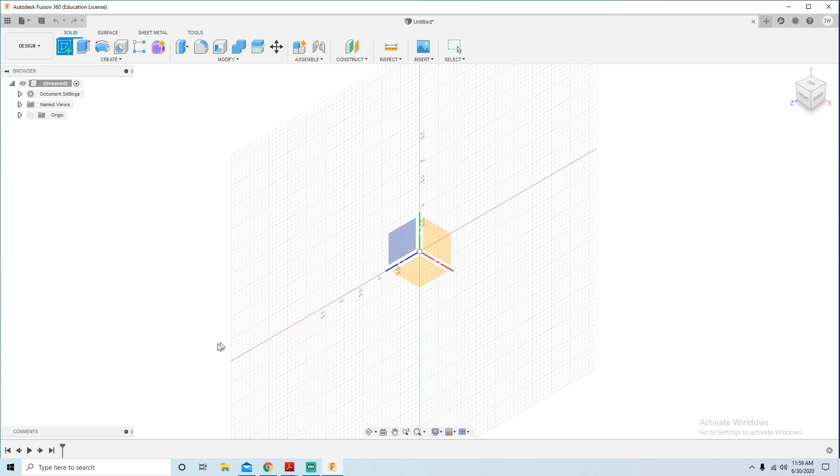The way I have mine set up is traditional SolidWorks, where my Z-axis runs along this plane, this is my Y-axis, and red is your X-axis. So I'm going to draw on my Z-plane, twist everything around to me, and then the first sketch I'm going to create on the Titan 4M, if you're looking at the print, is the base triangle.

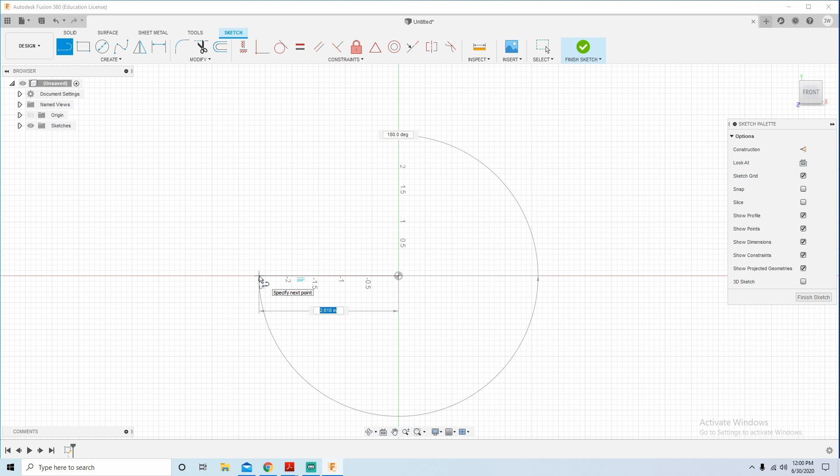I'll start by creating a line. On the print it starts off from center and drags out to 1.155. There's our first line, and then it tells me to go up to 2 inches on center. So here's our first leg.

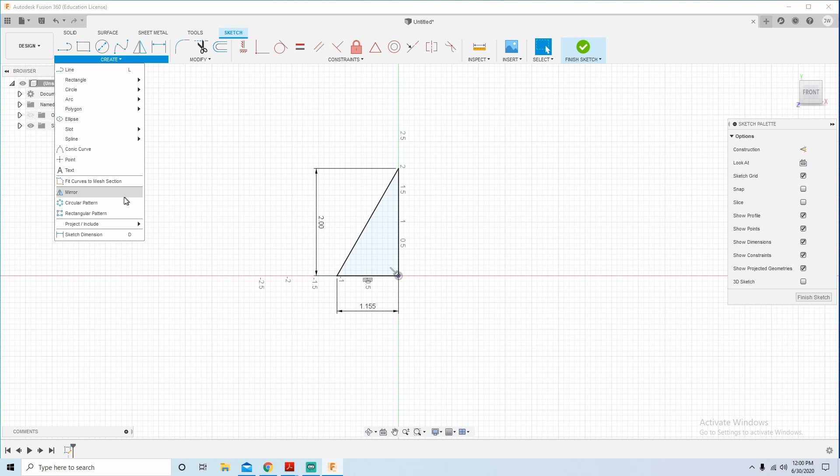Our second leg is made up of the exact same thing. If you want to mirror something, and this is a perfect example with this center line, you're going to do create and mirror. The objects you want to mirror are the actual lines, and the mirror line is the line you want to mirror across. Once you click on that axis, you'll see a phantom line of what's going to take shape. Just click OK. At this point we have our triangle drawn.

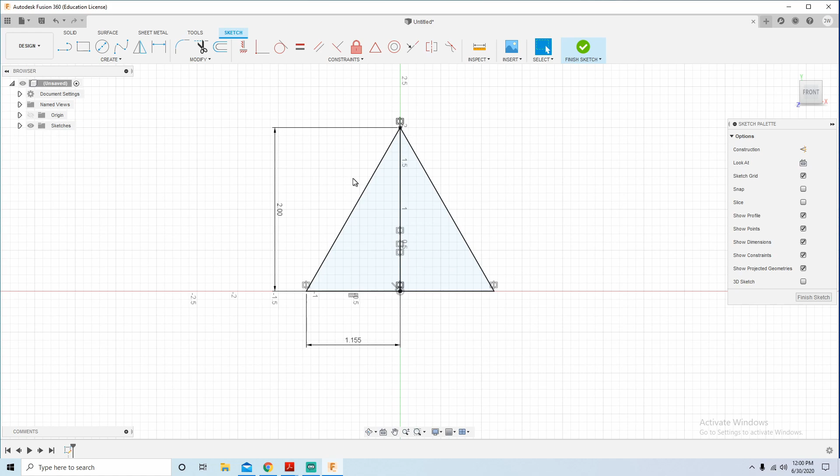The only thing left to do is the 50 thousandths radius on the very tips. I can do that by going to fillet, selecting the two sides I want, and changing that to 0.05. There's the first one, second one, and third one. Once that's done, we're going to click finish sketch. And there is our triangle.

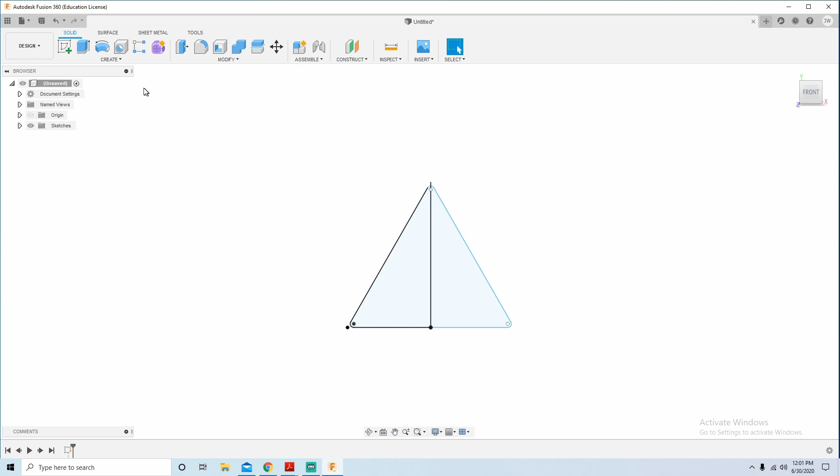At this point, we want to turn this sketch into a model. So we're going to go to extrude. The profile is what you actually want to extrude. I'm going to click both sides of that triangle.

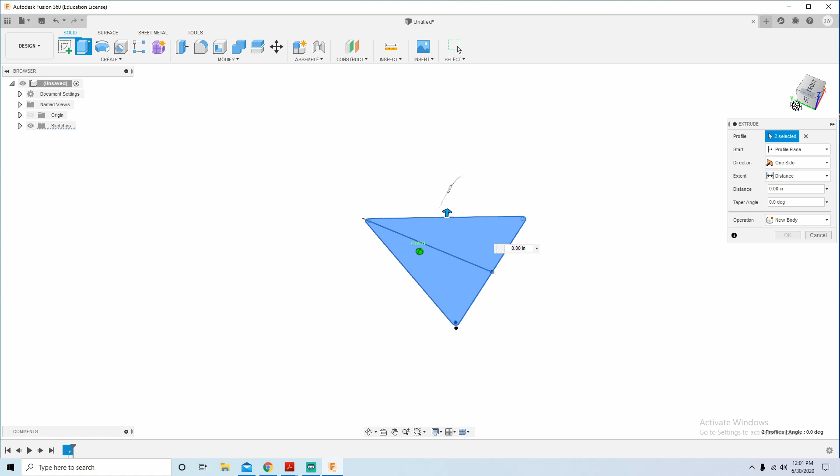If you hold the scroll wheel down on your mouse, it allows you to orbit everything around, or you can grab up here and move it around, to throw the axis off so you can look at an object in any shape, way, or view. You'll notice that upper right hand corner, the square is actually pivoting with me.

So if you want to take a second and set your preferences up like mine, you go in where your name is at, hit preferences. Once you're done, click apply and OK.

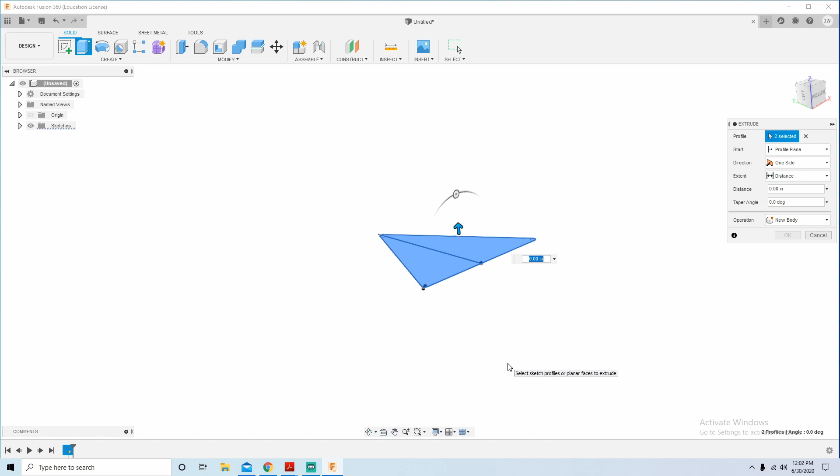Back to the solid creation. We've selected our profile - I'll do that again, we're going to select that first half and that second half. Then we're going to extrude this up 750 thousandths. Once we're done, we're going to click enter. And there is our triangle.

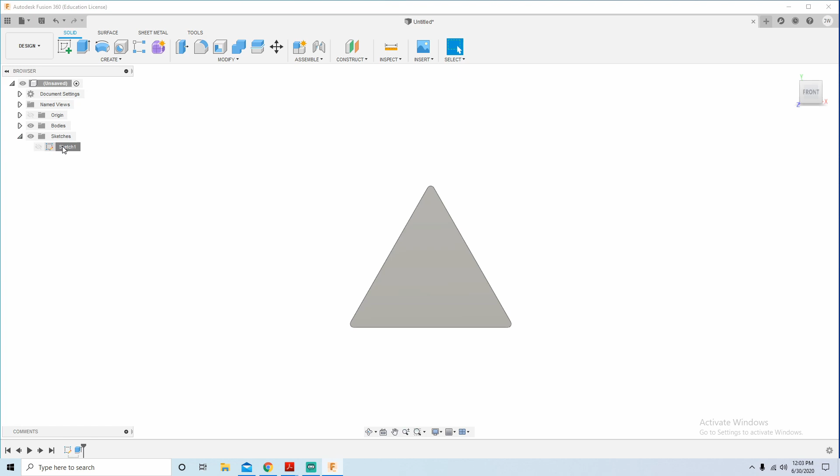To refocus, we're just going to go back to our front view and scroll that around. Now, at this point, the only thing left to do is the 3 holes, the inner pocket, and also the 3 side cuts. So now we're going to open that sketch where we can see it, because it comes off of this point up here for the first hole reference, the point out here for this reference, and then we'll mirror across.

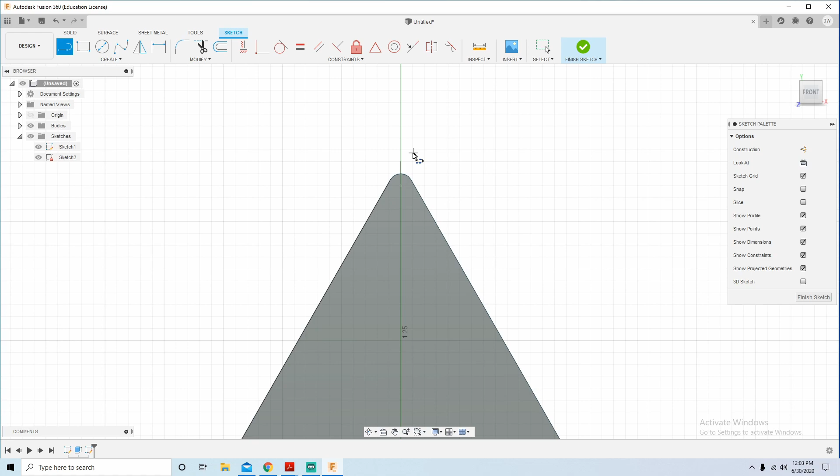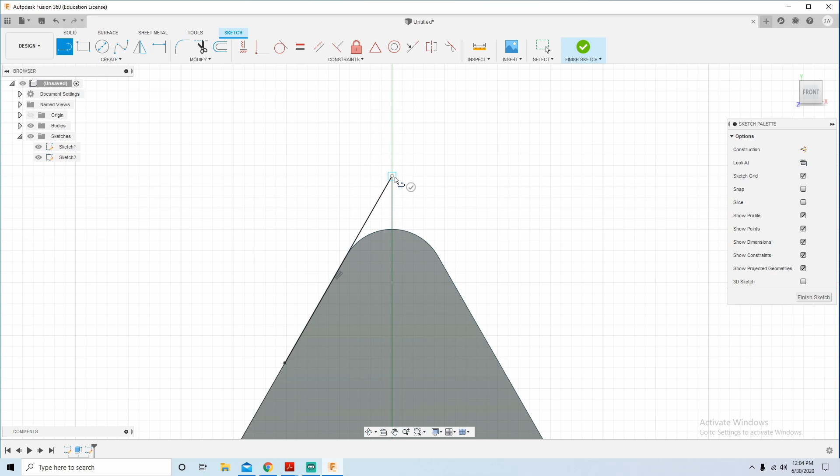So I'm going to zoom in and create our first line, sketching on top of the part profile itself, and my first point is going to be the end right there. Now if you're having a problem getting it to snap, don't worry, it happens. To get that geometry back, I'm just going to hover, click anywhere on either one of these lines, hover over the line for a second, you'll see that crosshatch, that X, and you drag that straight up, it'll snap right there. Then I do the same thing over here.

This is just putting the geometry back in its place and having the old geometry as a reference point. So now what we're going to do is create a line from here up to 1.637.

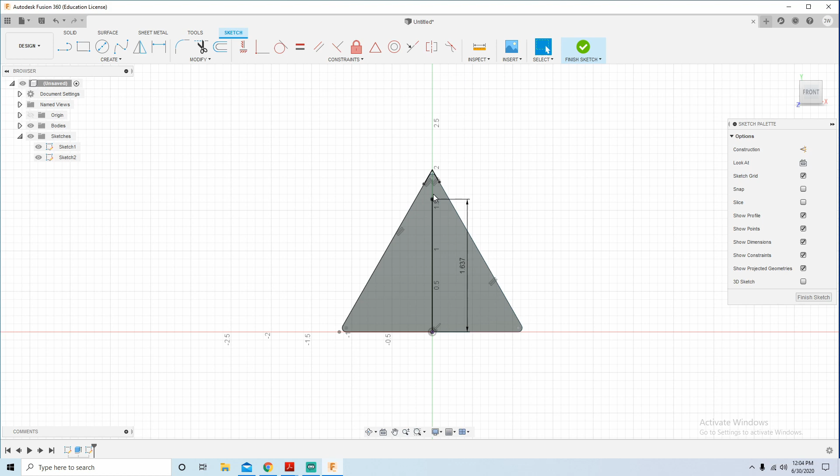There's the center of that circle, and again this is only for reference from me. If you don't want to do this, it's not required. The second hole position is actually this location right here.

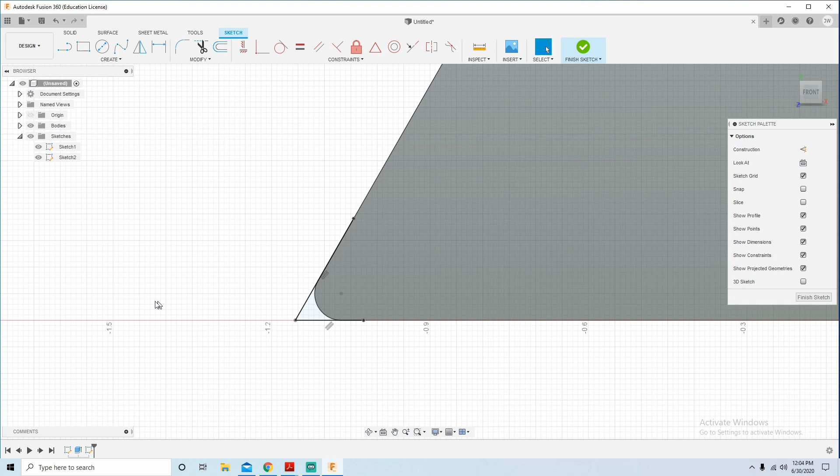So we're going to click line, or L. Now you'll notice I can't actually hover on that line, so you'll have to do what I did earlier. Hover over till you see that crosshatch, drag down, and it will snap. You can hit T for trim and cut that line off if it bothers you. It doesn't bother me, so I normally just leave it.

So now at this point, I need to create a line from the center out to 0.828. Now I'll need to create a line from here up to 0.189. Oops, sorry, fat fingered out and looked at it wrong.

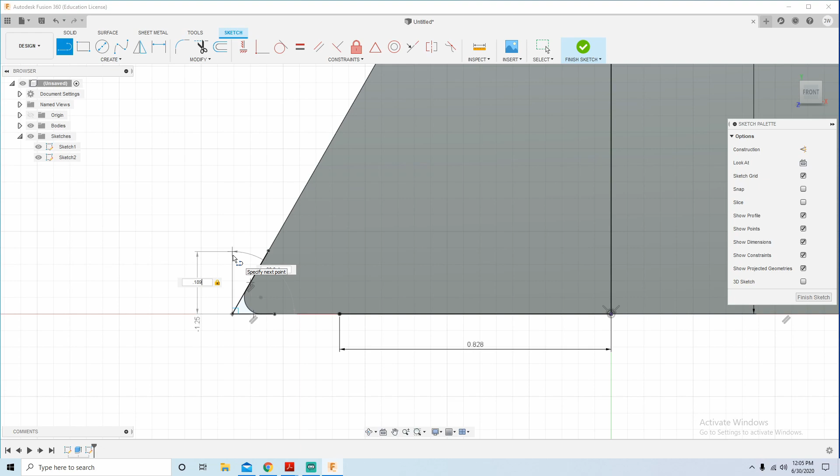Once I've got that created, I can go to my circle function and hover over this dot and drag up, and you'll notice I'll get 2 blue dotted lines right here indicating my intersection point where that circle is at. Then I'll click and drag out. That circle is a 10-32.

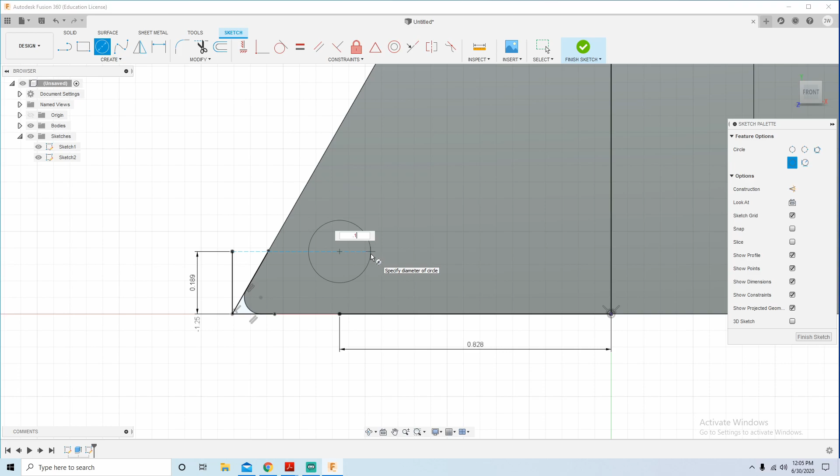So if you don't know what size to make it, you can make it any size. I'm going to make it 170, which is close to 10-32. Then my second point is up here. Drag that out, 0.170. And then I'm going to do the same mirror function.

So create mirror, select my object, select my mirror line. Oops. Select my object, and then select mirror line, and then select your line. There's our hole. We'll click OK.

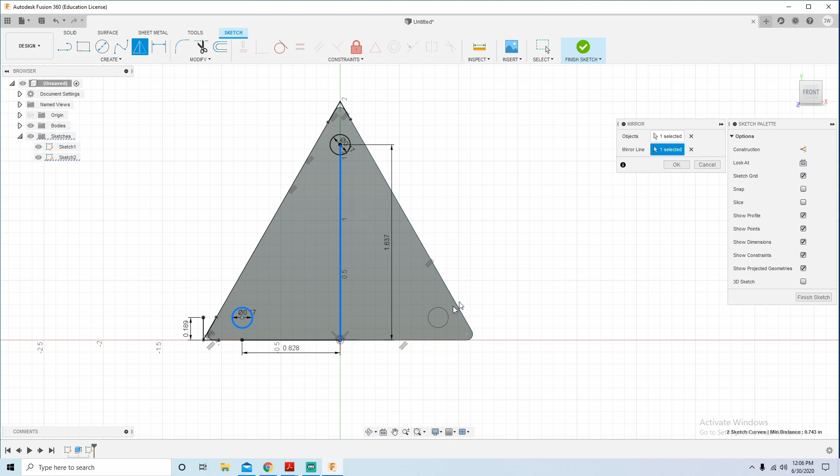Alright, so at this point, the only thing left to do is put the holes in. So we're going to start by selecting hole. We're going to select multiple holes. We need to call our sketch back up. It went away. And then we have to define what kind of hole it is.

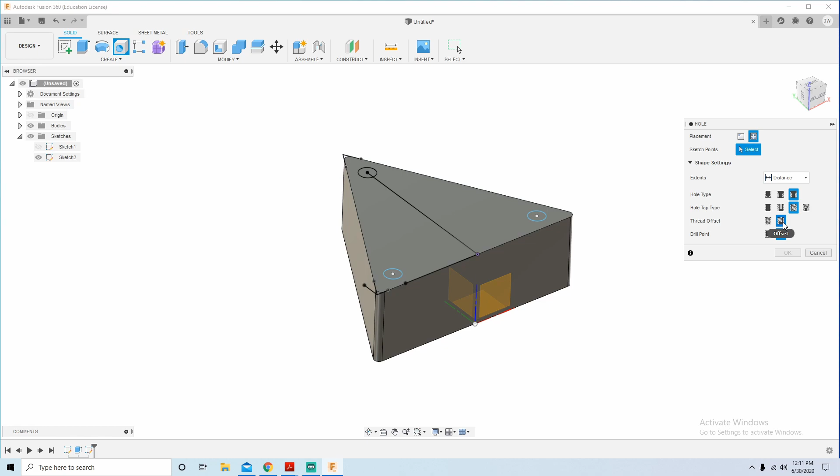So it's a countersink, threaded, offset, and we're not going to do offset because it's saying full. Actually, if you look at the print, that thread is going all the way to the bottom, and it's not flat, it is angled. So we're going to start by selecting our holes.

So at this point, we have all of our data in. And this number's a little bit wrong right here. Let's change that to 0.375 because this is showing it going all the way to the bottom. Make sure that you have all these in, so it'll be 375 thousandths deep, 205 thousandths chamfer.

I am using 90 degrees because I'm actually going to use a 90-degree drill mill from HTC. 118 degree drill point. Our thread size is a 190. It's a 1032 2B class fit, right-handed, and I'm going to click model, so it models the thread instead of leaving just a picture inside of a hole.

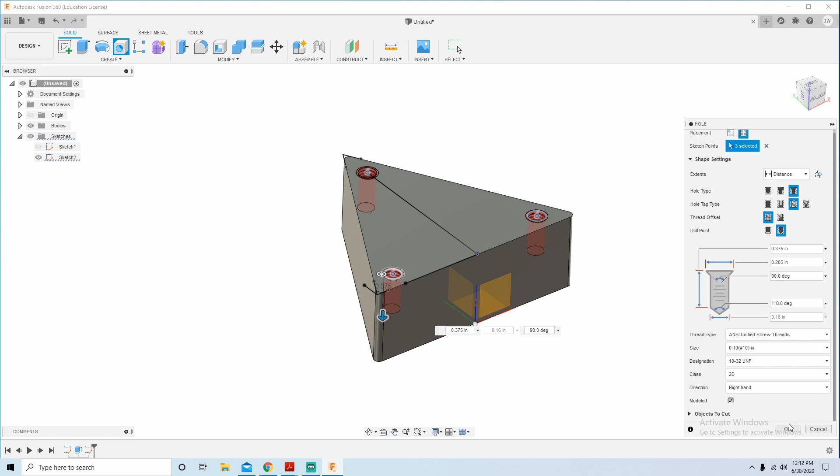And then at this point, the only thing we got to do is hit OK. Now you'll see the chamfer and the thread, and if I get this angled right, you'll see the point in the bottom of the hole. So them 3 holes are done.

Now what we're going to do is we're going to turn that sketch off, and then we're going to work on the pocket. So at this point, that pocket is really simple to do, and I'm actually going to go create another sketch for this, even though you don't have to. You could work off the first sketch, but I'm going to work off of a new sketch.

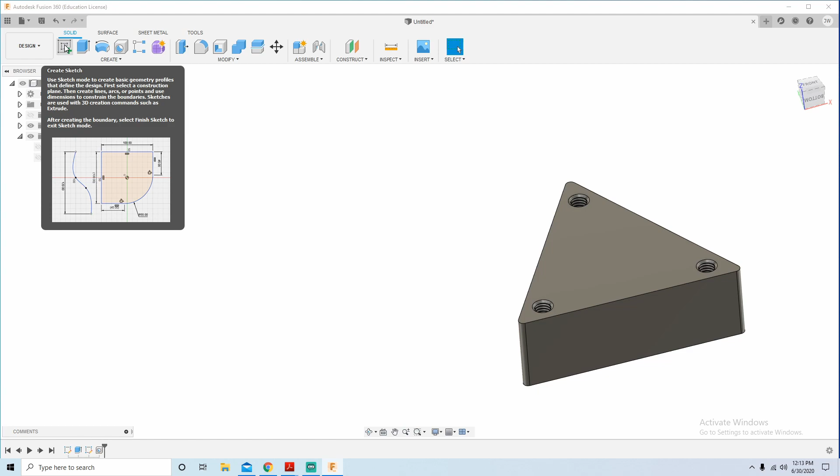So I'm going to do sketch, top of my part. It will automatically go to the face of it. And then we are going to draw literally another triangle stacked on top of this one. So at this point, only thing we got to do is click line, drag that up 2 inches, right?

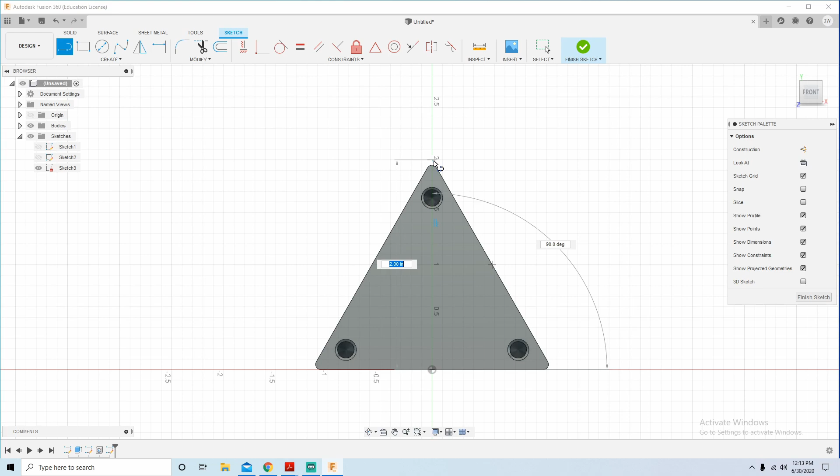I don't know if it'll automatically pick up. It won't. So 2 inches. Drag this over and out, that 1.155. And then here we go again.

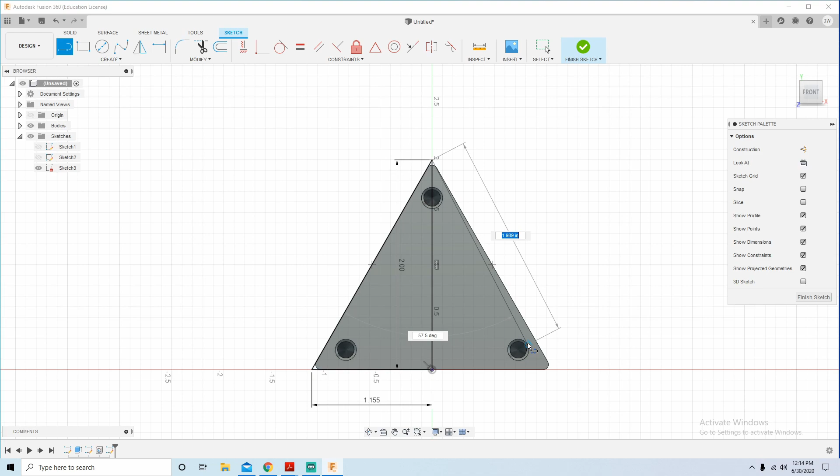So pretty easy to do, not very difficult. I am going to use a technique here where you're running parallel with it, and I'm going to just stack it on top, missed a line there. That way I don't have to worry about it, and then I'll trim it away later.

So at this point, there's my triangle that now exists. And then that inner pocket is actually an offset of 174.

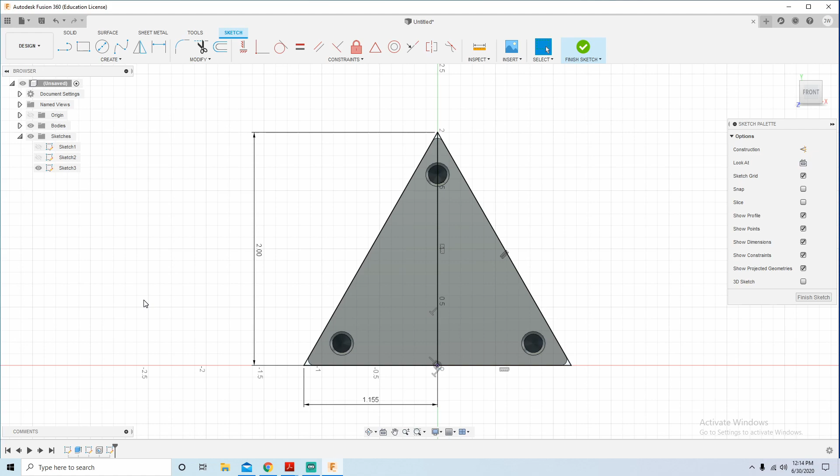So now the only thing I have to do is go to my offset tab, double click there, and type in 0.174. There is my offset amount. I'm going to click OK.

And then now all that I got left to do is put chamfers in. So now, pretty straightforward and pretty easy. So I'm going to come in here and click fillet.

Here and here, that chamfer, well not chamfer, that radius is 0.189. And I've got the same thing here and here and here and here. So that's done. Just click enter. That will go away. And then I have the outside radii.

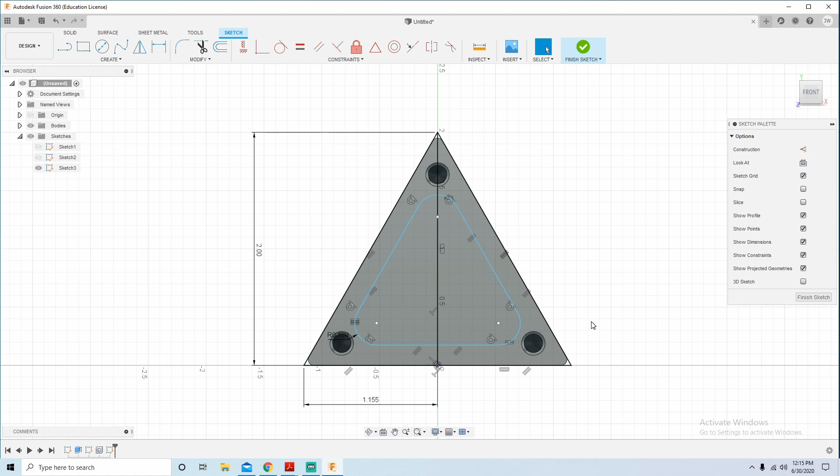Now it is actually saying the outside radiuses are also .189.

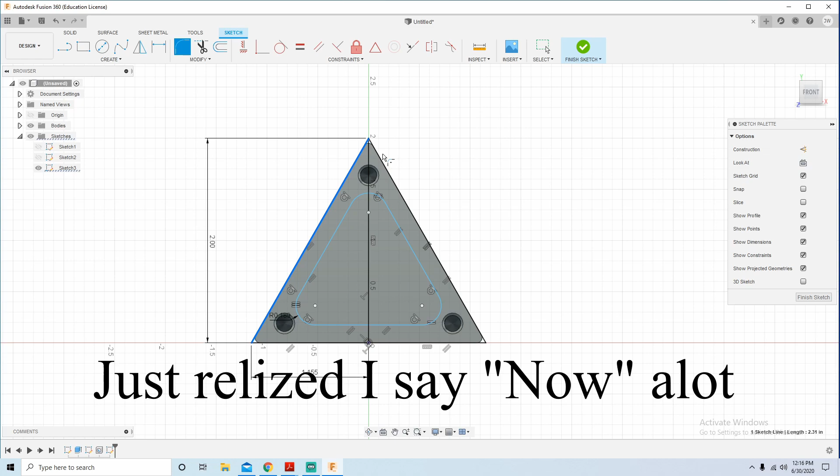So let's do that. Let's do the outside radius of .189. Fillet, there and there. I know this looks a little funny, but there we go. So there is all of our radiuses in.

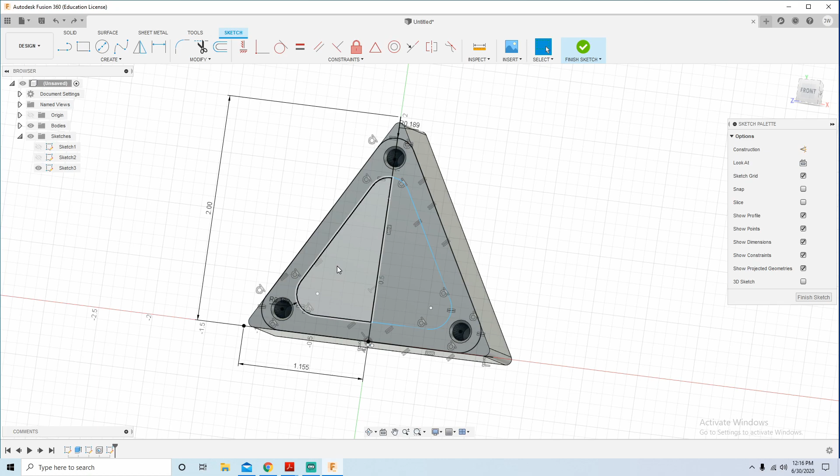So now at this point, only thing we've got left to do is extrude these little end pieces down on the ends, and also the pocket. Now they are two different extrusions, which is simple to do.

You're going to do extrude. I'm going to do the pocket first, and that I believe is a 1/2 inch. Nope, 650 thousandths deep. So minus 0.650.

Then I'm going to turn this sketch back on and do extrude again. And then I'm going to go around and select all these little pieces and do minus point.

What's the depth on those? I'll find it here in a minute. 375 thousandths. So it's in a little note at the top of the triangle. So there's the end pieces.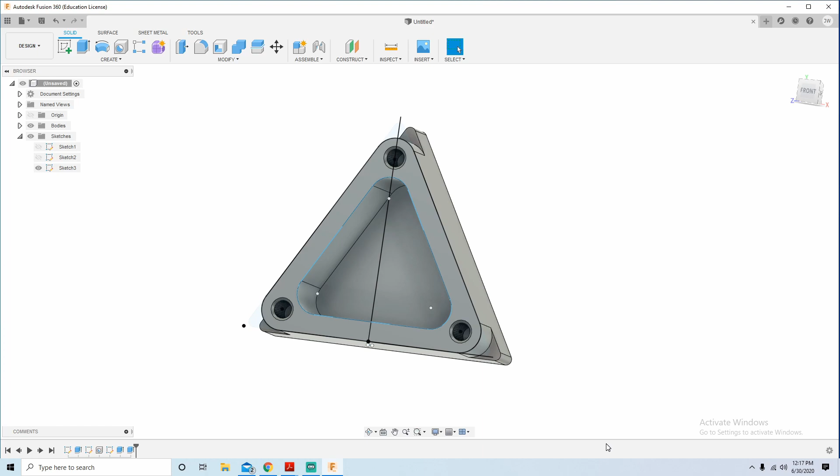Now at this point, only thing I got left to do is the side cut ends. Turn all the sketches off so you can see what's going on here. The only thing I got left to do is these side cut ends.

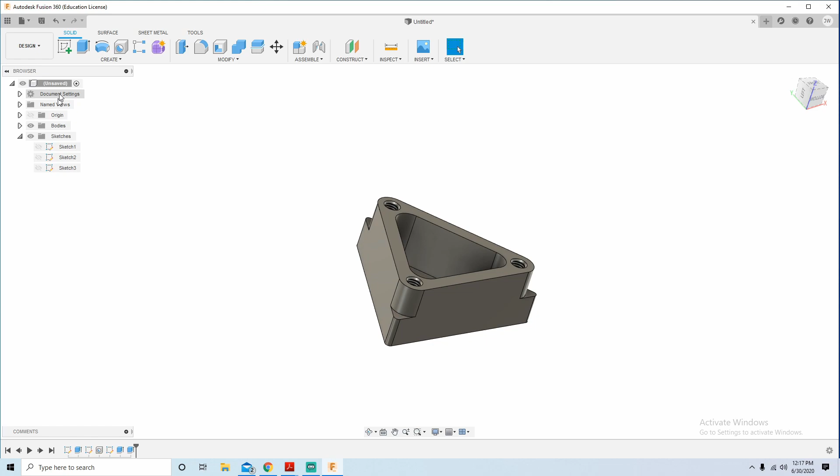Now them side cut ends are actually on this plane. If you're looking at the print, you'll notice the bottom of it is 375. So I'm going to create a sketch, and I'm actually going to click on that plane. Now you'll notice at this point that plane is cutting that part in half. That's exactly what I want.

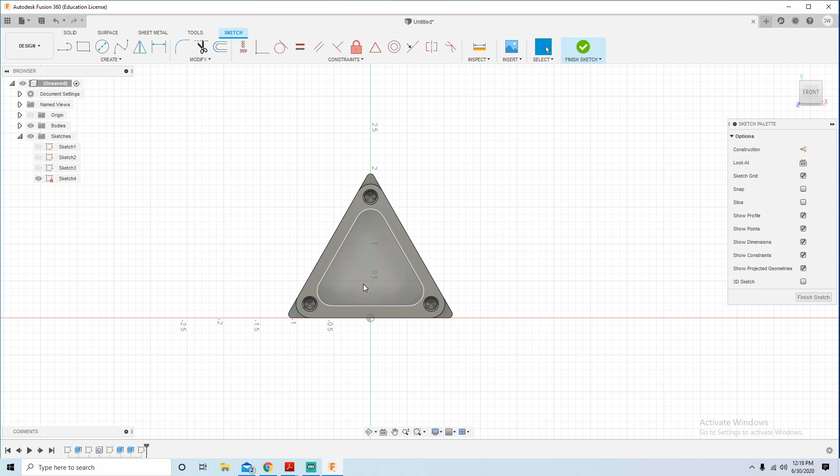Go back to our front view, and then we have some really rather large circles to create. So our center point is actually up here. So we're going to create a line, drag a line up to 667 thousandths. There's our center point, and then from there we can do all of our dimensioning.

Well, we got a center point here. Oh, I'm sorry, no, I need that. What am I thinking? That's the center of all of them. So I do need that point, and then our other point is way out here.

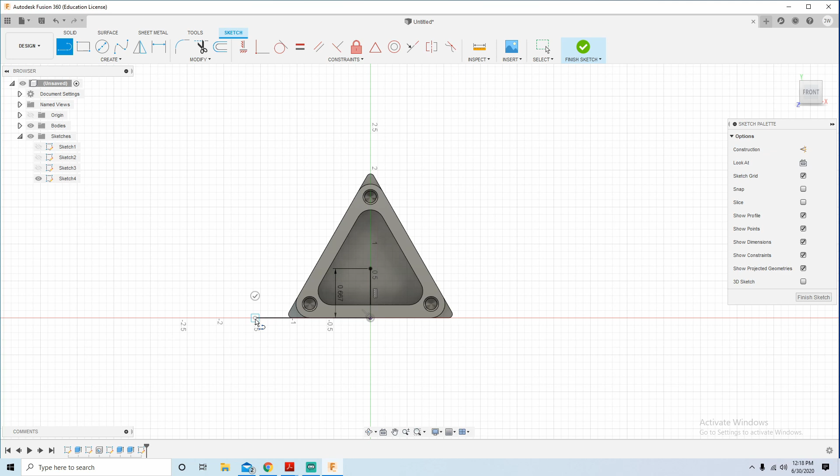So there again, line, drag it out. Line, whoop. Might not be able to do that trick here. No, I can, there it is. And there we go, then we'll trim that off.

So there's our origin here. Here's our center point. Our other origin is technically here. So at this point, I'm going to create some lines.

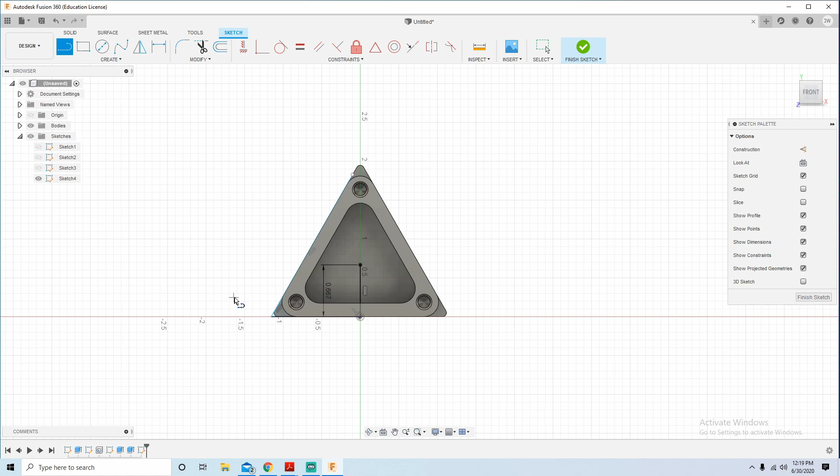The first one is from here out, so 2.222, enter. And the next one goes from here up. And I know this doesn't look like your print, but believe me, it works.

1.949. Now at this point, the center of my circle is right there.

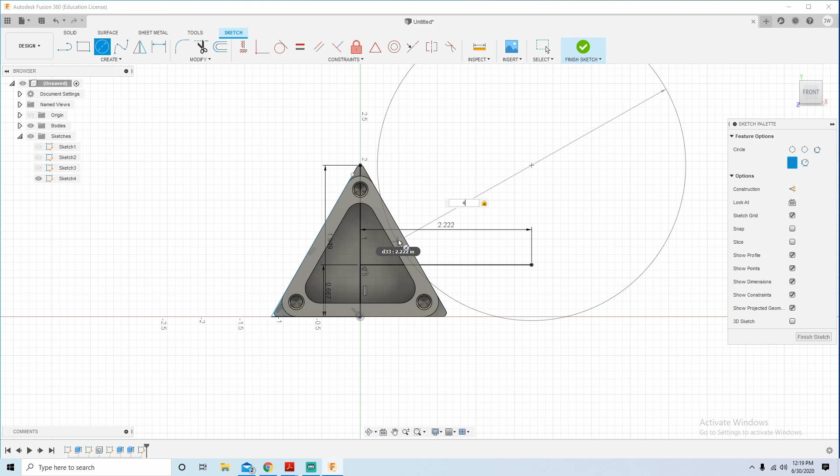So if I change the circle, I get my blue line to come up here. I get my blue line to come there. There's my circle. I'm going to drag out and type in 4. The print gives you a radius. Fusion wants diameter. So there's my 4-inch diameter.

There it is. So now at this point, only thing you got to do is actually copy this 2 times. Very simple, we'll go to create, we'll go to circular pattern. Object is our circle, the center point is our point right here.

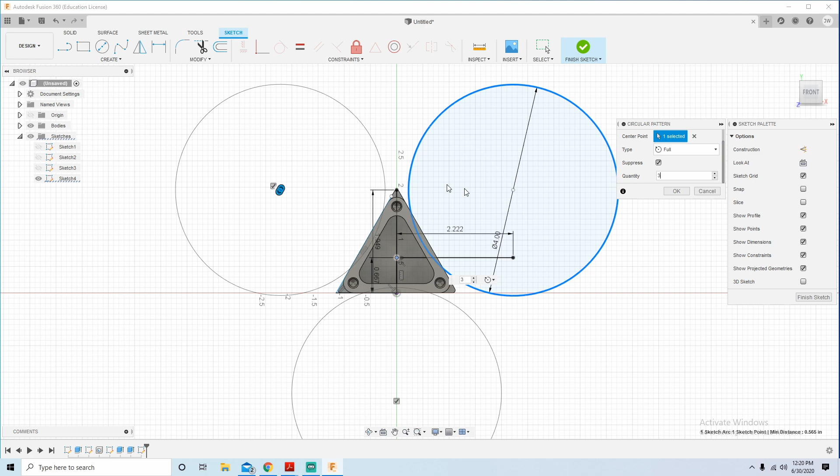And then it'll ask you how many times. 3 times includes the original, so if I do 2 times, it's only going to do it once. So this is a little bit weird right here. It's asking how many total objects that you want, not how many times you want to actually copy it. So type 3 and click OK.

There's our 3 locations. Then at this point, we are done with the sketch. We're going to extrude, click the 3 circles, and then come back and fill in what it missed.

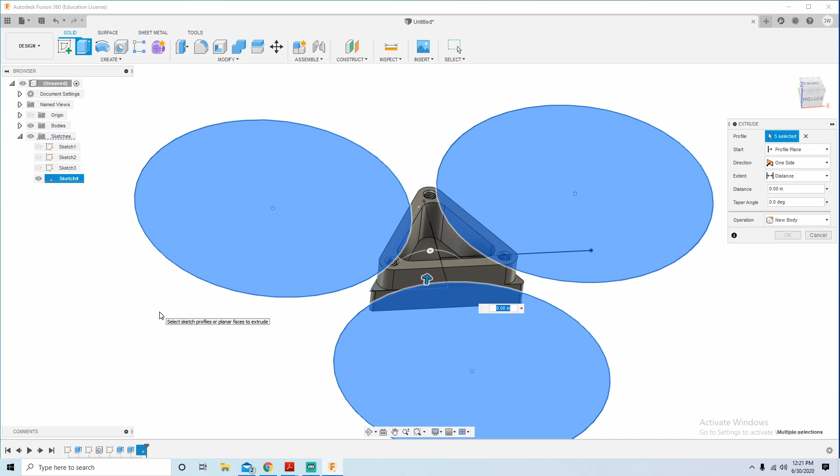So now at this point, we're going to offset that up 0.125. It's automatically going to default to cut because it's showing that we're into the part. Just click OK. Once Fusion gets done rendering it, you are left with this shape right here.

This is the completed part minus the chamfers. Chamfers are really easy to put on.

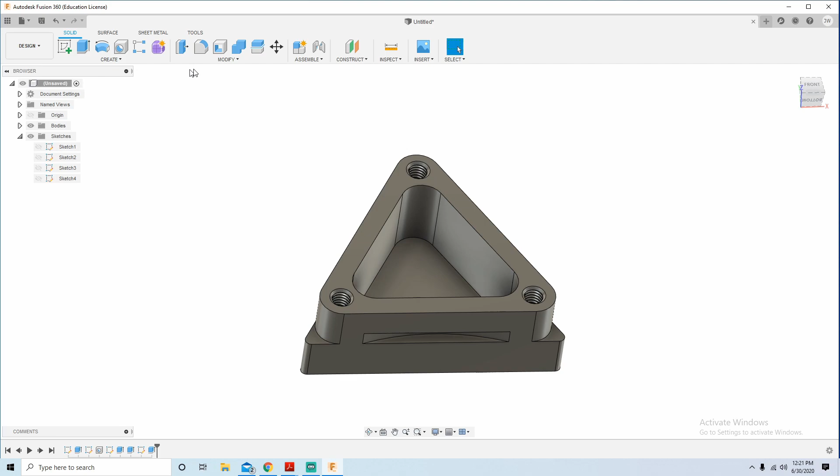We're going to go to modify, fillet, click here and here, and we're going to type in 0.02. So I put a 20 thousandths chamfer on there. You can really put anything on there that you want to. It's your part after all.